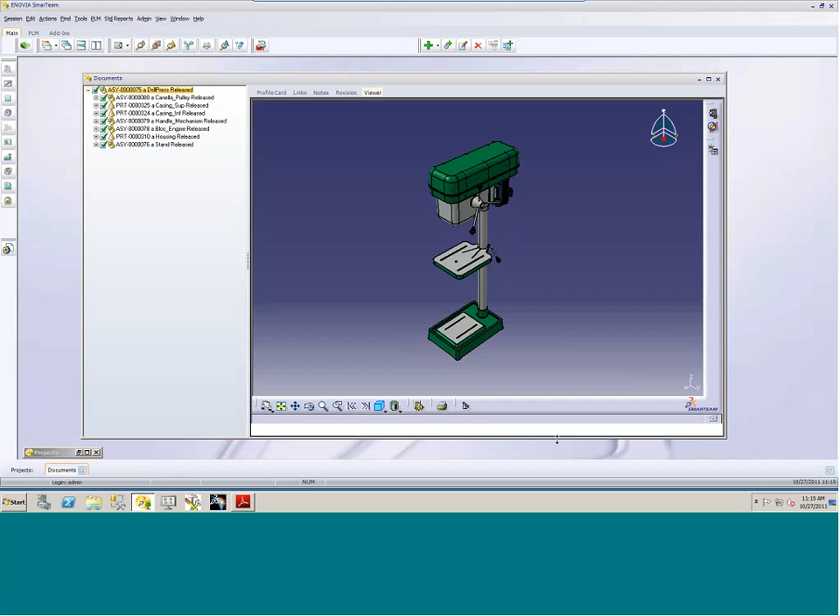So what I have here is some CAD data on the screen, and if I go to the viewer, we can see what it is. Basically what we're dealing with is a drill press. My goal today with this drill press is to take the stand assembly through the bill of material process. I'm going to create an engineering BOM out of the stand, and I'm also going to create a packaging BOM out of the stand. So I'm going to create a couple different versions.

If you're familiar with SmarTeam, then you've seen the profile card before. Within each of these parts and assemblies on the left here, as I click across them, my profile card is going to change and show me information about them. If you've been using SmarTeam much, this is pretty familiar to you. But one thing that may not have been talked about much is this item number. Typically, it's blank depending on your implementation. This can be driven from the CAD, but this item number is what is actually going to drive my item number in SmarTeam when I go to create my item structure.

Okay. And then the other thing is when I look at links, there are a couple link types over here that you may have noticed but not actually done anything with before. We have specified items. Specified items are going to be BOM type items that my CAD data is related to. And you can see as I click through this, I really don't have any today, but I'm going to create some.

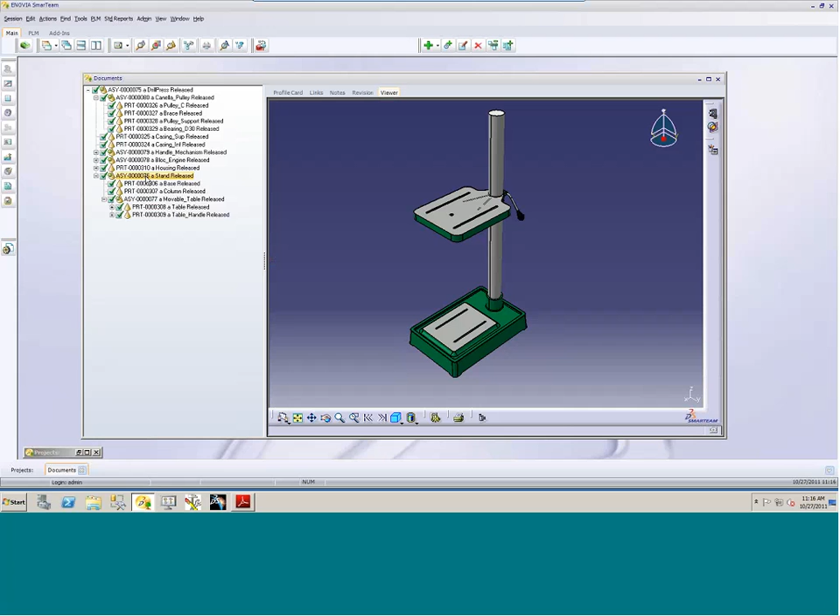Okay, so what I'm going to do is take this stand, find it here at the bottom, and open this up into its own window. I'm going to right-click on there and say Open Views, Top-Down Tree. I'll get rid of the original one just to avoid confusion. This is really the component I'm working with today.

So I want to create an engineering BOM and then a packaging BOM out of this particular stand. I can create a BOM any number of ways, but what you have the ability to do in SmarTeam is right-click at the top level and select BOM from Documents, which is going to be the easiest way to at least get a start. It's not the only way.

I can go in and create items, create BOMs, and start linking them from that standpoint, then link CAD data underneath it. But if my structure is good, that's a really good starting point, and I feel like that's probably going to be what you do most of the time.

Now, the other thing I should mention is it is possible within SmarTeam to have this item structure built as you save the CAD data into SmarTeam. My environment's not set up that way. I'm choosing to, as necessary, go in and create my BOM structure on the fly.

So again, I'm just going to right-click on my CAD structure, BOM from Documents, create/update BOM document.

You're not going to notice anything happen right away, not a lot of bells and whistles, but if I go over to my links and specified items, now I have an item that's actually linked to this CAD data, where I didn't have that before. I was clicking through it and you saw I didn't have that. As I click through this structure, notice that it created an item for each of my different components.

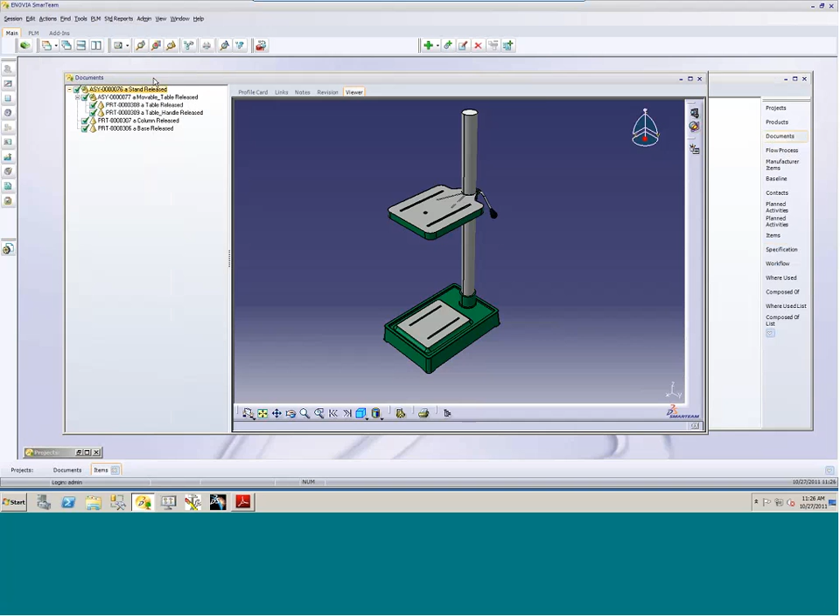Okay, so the other thing that I may want to do, let's go back to our initial folder structure within my project. And here's my project, just like standard SmarTeam. I've got a project, and I want to start uploading some reference data.

So maybe I'm going to put it under design. I've got some FEA data that I want to associate with this. So from there I'm just going to go to Actions, Upload Documents, and from my desktop I'm going to pick this image. And this image happens to just be an image of FEA results.

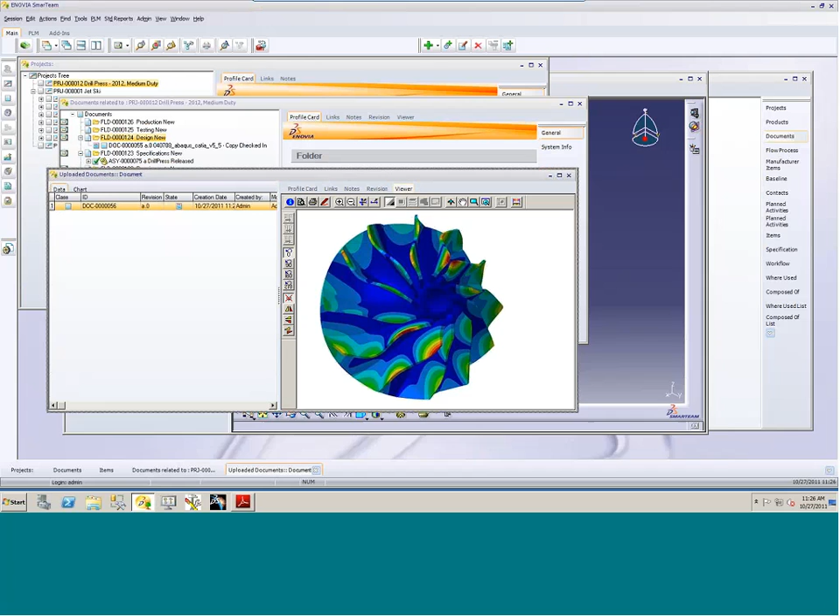So it's a document. It is just an image. It's not the actual FEA modifiable data. So I'll say Upload. And if I go to the Viewer tab, there's my FEA results. And I'm not so sure this belongs to the stand or not, but it works for my purposes here.

So I've got this into SmarTeam now. I don't necessarily need to release it. I just want to make it as reference data. I'm going to close some of this other stuff in the background.

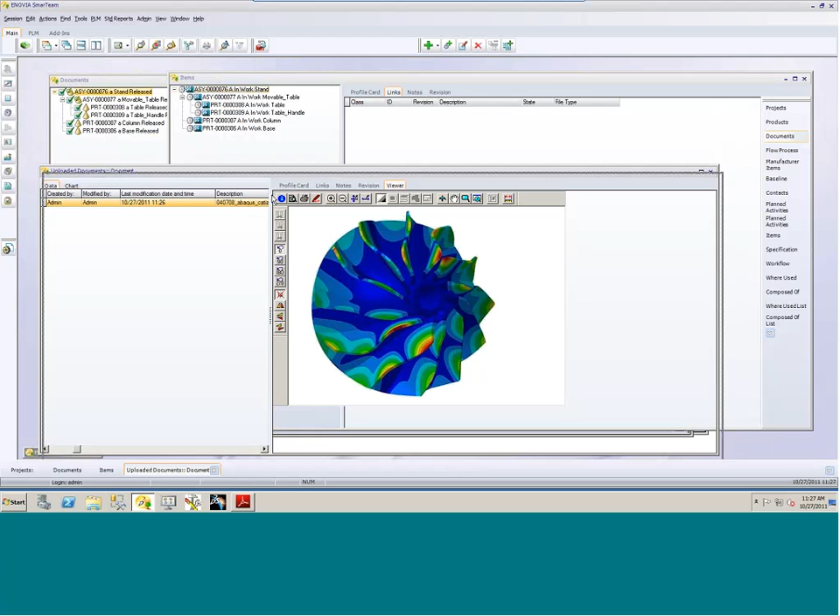And really what I want to do is I want to link this in as a document. Again, it's not a specification that I want to drive anything, but I just want it to be referenced. And now it's in there as a reference document. Okay, so now the nice thing is I've got all this stuff linked in here, but really it's kind of cumbersome to have to go jump specification document to see everything linked to this.

So now what we have the ability to do is we can go to associated objects, and basically within the context of this left window I can say show me all documents associated to this tree on the left. And there's my FEA results. But I also want to see specifications, so I can right-click and say Associated Object Specification Links. So now you can see where my tree is really getting to be different than what my CAD data is. Now I've got an item, I've got two different specifications which are listed in red here, and then I've got a reference document.

So the other thing I can do is now I can do a bill of material compare. So what bill of material compare lets me do is compare two different types of items—well, I don't mean items, I mean two different types of structures. So when I pick on bill of material compare, if I've got this selected, it assumes that I want to start with this item, and it says, okay, what do you want to compare it to? So I'm going to do a quick search to compare it to my CAD data.

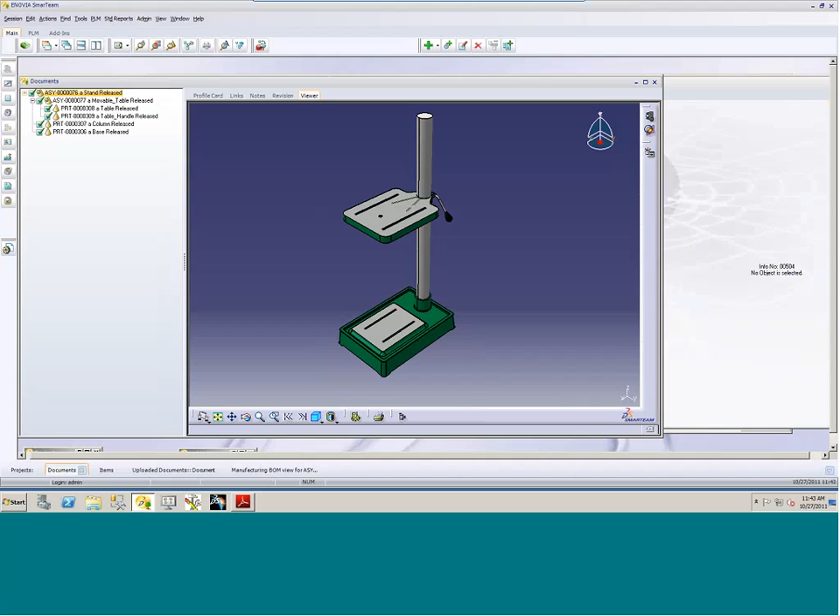So there we have side by side, the three different data structures that we've created so far within the last half hour or so. We've got the CAD data here on the left. The CAD data is really the only one that's got viewers, because it's the only one that's got real CAD data to view. But the benefit of having it there...

...is that now I can easily, from within my item structure, access my CAD data just as easily, because I'm looking at my item level. I see there's my CAD data, and as soon as I click on it, I get the viewer here too. So I can view that data here. I can view my part marking specification. I can view my FEA analysis, all right here from within my structure.

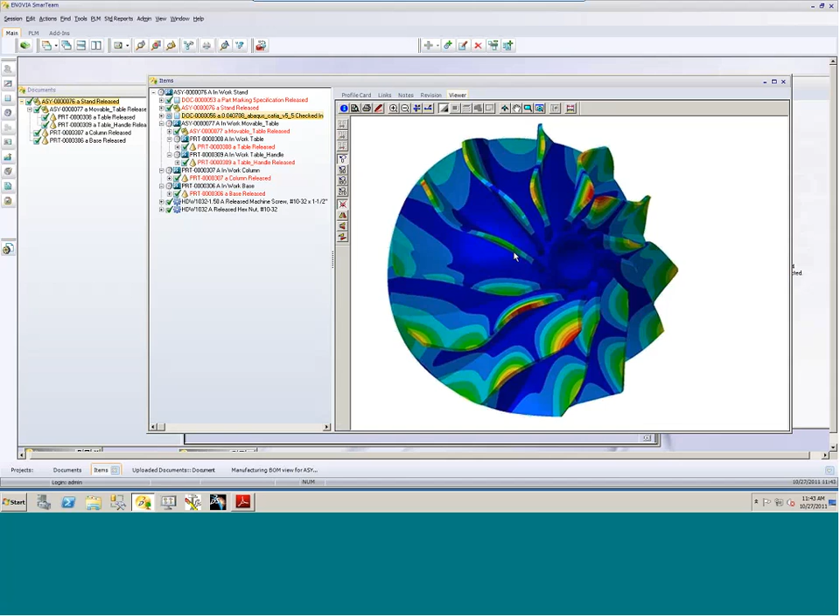And if I go over to my manufacturing bill of material, right-click on this and say associated objects, I want to see all my specifications there as well. Notice all my specifications are there, because when I copied this, all my specification links got brought over. Now I can go to associated objects and say I also want to see all my documents. So there are documents associated to it. So again, from a manufacturing perspective, I not only can change hardware and components, I can add new documents. I can do whatever I want to make this structure really my own.

Now, the last thing I'm going to talk about here, we're trying to keep this within an hour if we can. The last thing I'm going to talk about is just a little bit about workflow. Getting the data into SmarTeam is one thing, but another big benefit is being able to manage a workflow. And within SmarTeam, at least this version of SmarTeam, again, this is an express version of SmarTeam. So we'll talk about what's out of the box and what's customized here, which is really nothing if you have the right environment there. So we have these default processes.

Some of them are related to items. I have standard item approval. I have item release. If I want to send this item through a release process, I can right-click on it. I'm not going to take it through the whole process, but I can pick on item release. And it kicks off a workflow for this particular item. And in fact, all the sub-items are part of that workflow as well.